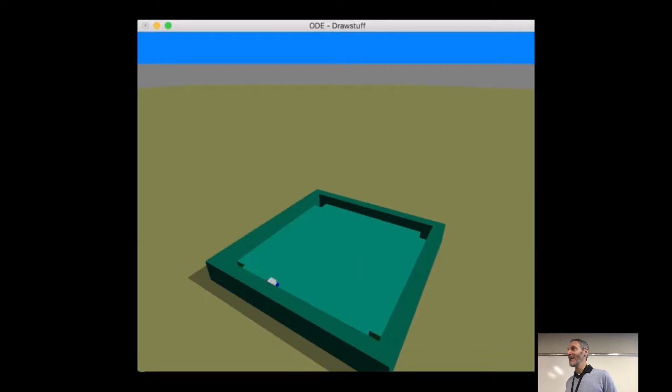Okay, you can read the rest at your leisure. I put in some links to the lecture slides here for some more interesting projects from years past. This is one of my favorite, the billiard bot. You can imagine it took the evolutionary algorithm a fair bit of time to find that neural network controller. Not bad.

Here's another project. Wait, sorry, I have a question. Sure. In the last one, did they evolve it on different configurations of the balls, or was it the same one? I don't remember the details, but if you click on that link, you can watch the full video, and I think there's more details in there. Yeah, good question.

Okay. All right, so back to why robotics. Last time we talked about the field of robotics in general, why it might be useful to try and create autonomous machines. We're going to speak, obviously, in this course about evolutionary robotics. So why would we try and create an evolutionary algorithm to automatically design an autonomous machine for us? Why not create one by hand using teams of human engineers?

There's several reasons why. The first one is that even if we build the body of a robot, like the nonaped that you see here, which is a 9-legged robot, even if we build by hand the body, it's very non-intuitive to see how to program it to produce useful behavior. So probably no one in robotics would argue that anyone is going to go in and hand design a neural network controller for a robot. It is a very non-intuitive problem. And I'm going to use the nonaped to motivate this.

The nonaped that you see down here in the bottom left is built from 2 Stewart platforms. There's a little animated GIF here showing you how a Stewart platform works. It's a little difficult to see in this GIF, but there are 1, 2, 3, 4, 5, 6 moving pistons that attach these two plates together. And as these pistons decrease and increase in length, they change the relative position and orientation of the plates relative to one another.

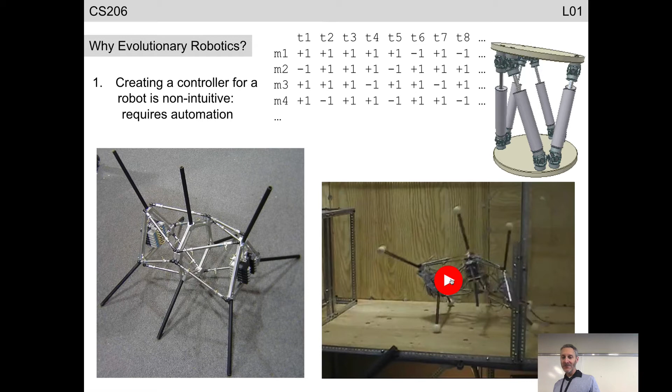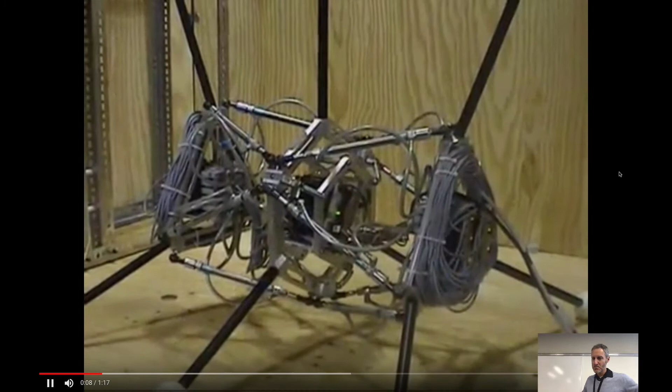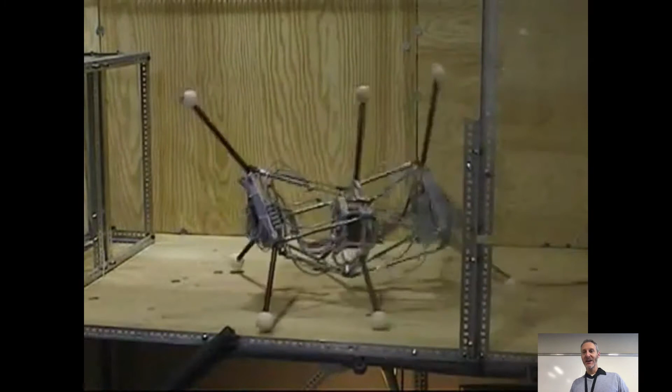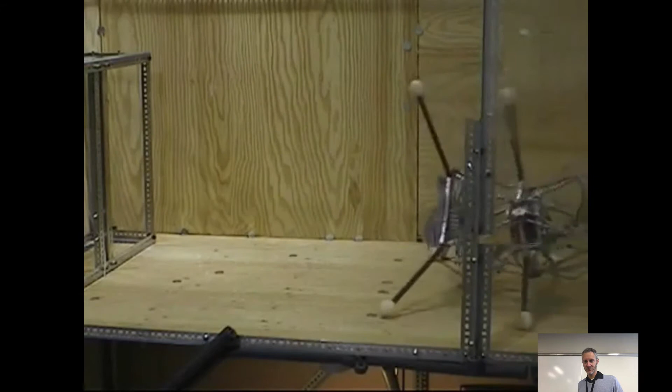We measured how far the nonaped moved, downloaded the next matrix, rinsed and repeated over many days. This was a physically exhausting experiment to be involved in. And at the end, we got things that looked like this. Attempt by the evolutionary algorithm. This is the nonaped stretching, warming up. Oops, sorry.

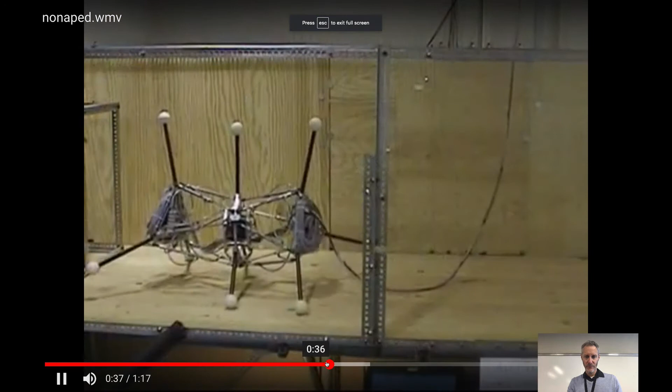At this point, when we saw these, we actually did start to get an intuition for how you might build this matrix. This one, not so much. So now the evolutionary algorithm is finding gaits faster than we could through human intuition. Okay. That's something you worked on. This is something I worked on.

So this was a project for NASA, and they were interested in this particular design for a particular reason. Why? It can't flip over. So the rovers that are on the red planet at the moment, if they ever enter a crater and start rolling down the edge of the crater, it's game over, right? So like we saw with the tensegrity robots on Tuesday, NASA would like to be able to send probes where orientation doesn't really matter. They can roll and tumble and carry on with the mission. This is one early idea that we helped out with.

Okay. How come you didn't do any virtual simulation stuff? Was it just before? So the reason why we didn't do any virtual simulations of this robot, as you can probably recognize, the dynamics or the movements of the robots are pretty complex. The robot itself is complex. One of the big challenges, which you will have hands-on experience with, is trying to simulate a complex mechanical device and make sure that it is stable in a virtual world like a physics engine. This is a non-trivial problem and is still an open challenge in the field.

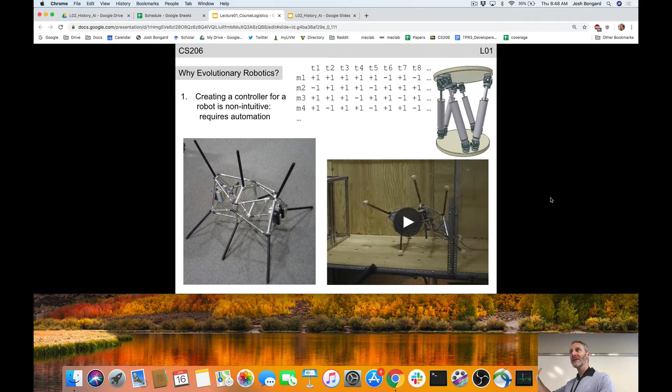We might be able to evolve very sophisticated virtual robots, but they often exploit details or inaccuracies in the physics engine that don't exist in the real world. And if we go to the considerable time and expense of actually manufacturing some of these evolved virtual designs, they do not do in reality what we saw in virtuality. It's called crossing the reality gap, and we'll spend a fair bit of time talking about it in about a month's time. Okay. So there's one reason why we want to automate the design of the controllers. In evolutionary robotics, we're going to use an evolutionary algorithm to design the controller.

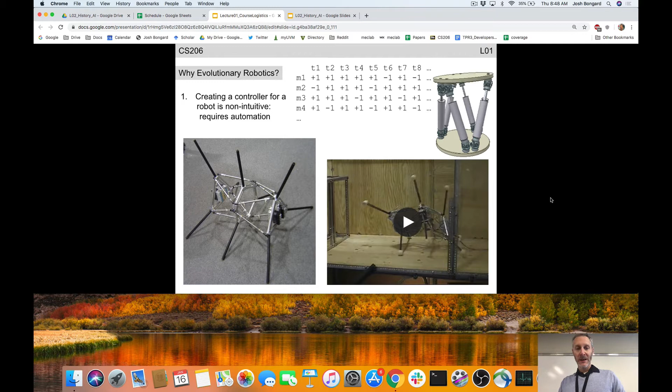It turns out that it is also often difficult. It is also difficult to come up with the right body plan in a lot of cases. So the nonaped, which was made of these two Stewart platforms, a lot of human ingenuity went into this problem. If we want a robot to perform a specific task, it is not always immediately obvious what the mechanical structure

should be. So again, going back to the example of NASA, NASA goes back and forth between thinking about sending legged probes or wheeled rovers or drones or crawling robots. We don't know a lot about the surface conditions of wherever they're going to send a probe, so it's not immediately obvious what the right body plan should be.

So one of the main distinguishing features of evolutionary robotics compared to other branches of robotics is, in many cases, you'll see that we're going to expand the breadth of evolution and allow it to tinker with the body plan as well as the controller. In the tensegrity robot example, in the nonaped example, those body plans were sort of unorthodox, but they were still designed by human engineers.

Here's an example just in a virtual space where the evolutionary algorithm is designing the body along with the controller. They're not very obvious body plans. You'll notice some of the elements of this robot are black and others are gray. Objects that are black have no neural control inside, so they're kind of like bone or a passive support. And the gray spheres that you see here have some neural structure in them.

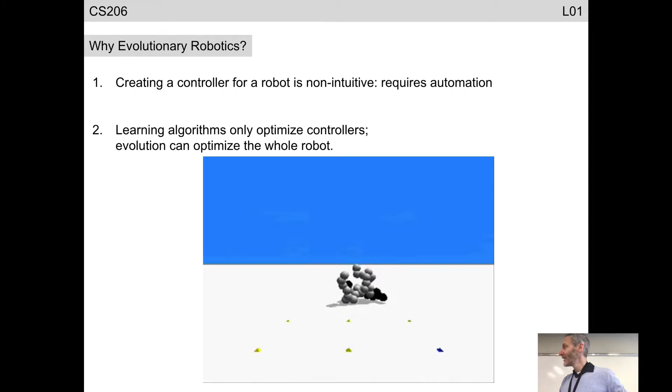Here's a design which for some reason manages to do well, which is to move quickly into the screen. Here's a bilaterally symmetric robot, which may have potential, but doesn't go anywhere, so was quickly deleted from the population. You can see, again, in an evolutionary algorithm, most of the candidates are non-functional. Here's sort of a non-obvious but functional design.

Okay. So what are the advantages? A research question which we will explore is, what are the advantages of automating the design of the body plan along with the controller compared to just manually designing the mechanical structure and optimizing the design of the controller?

Yes? You could save the time that it takes and the thought it takes to actually design the physical robot. Exactly. If we can automate more of the design process, it should speed things up, right? Human engineers are incredibly talented, but it still takes time to design and verify a mechanical structure.

Yes? Are you able to take the evolutionary algorithm and push it in a direction that you sort of want it to go down? Can we push the evolutionary algorithm down the path we want it to? You have a lot of these multi-legged vehicles. Yep. So you're obviously trying to get towards a centipede kind of motion. Can you just say, look at this, try to figure out how this works, and then evolve past it if you can? That's a great question.

So again, this is something we'll explore later in the course, which is how much detail do we give the evolutionary algorithm about what we want? And it turns out that there's a gradient. We can say, we just want a fast-moving robot. That's it, right? We can be as vague as we want, which has its advantages and disadvantages. Or we can say, we want something that's bilaterally symmetric. The left side of the body should look exactly like the right side of the body.

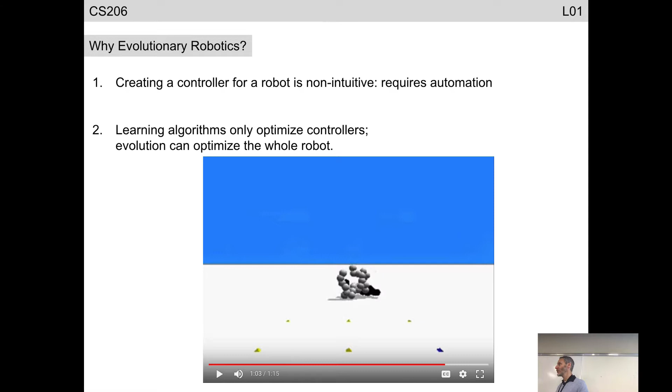Or we can go further and say, we want a centipede-type structure. Here's some videos of motions of actual centipedes. Do something like that, right? We can be more or less specific, and there are pros and cons to where on that gradient you pick your point. We'll talk about that again later.

Okay, good question. Okay, so this idea of expanding the evolutionary algorithm to include the body, this is sort of a step along the path of the history of AI, which we'll get to in a few minutes. Most of the early decades of AI was dealing with creating a non-embodied AI, like a neural network.

So here's a little cartoon picture of a neural network where the gray circles are meant to represent neurons and the arrows are meant to represent synapses. We would like this neural network to take as input a photo, for example, and output a signal indicating whether the neural network thinks there's a cat in the image or not, right? Sort of standard non-embodied AI approaches.

If we have a neural network that's doing an okay job of recognizing cats in photos, and we alter the weight of one of these synapses, what's the impact on the ability of the neural network to recognize cats in photos? Does it get better? Does it get worse? Does it get worse by a lot or just a little? There's a lot of early work in AI about fixing the architecture of the neural network and then tuning some of the parameters.

Was there a question? No? Okay.

In just a few years, now that neural networks research has made some progress, there are now questions about, can we automatically design or tune the architecture of the neural network? So now, instead of the human fixing the architecture and allowing the computer to alter parameters, can it start to add and remove neurons and synapses?

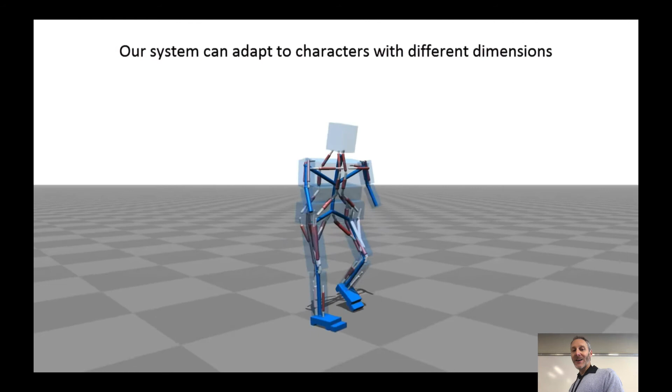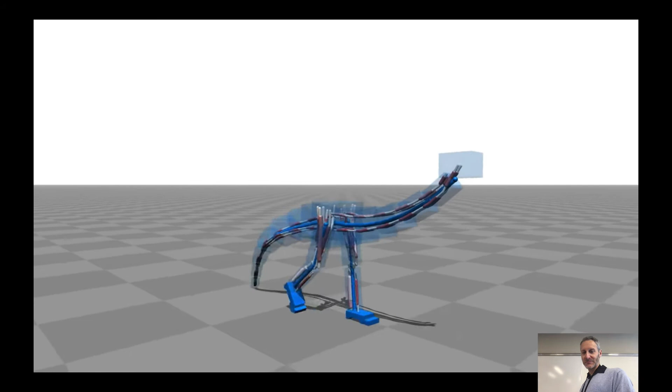In this case, they're fixing the body plan, but they're evolving the muscle placement inside the body. Why would they do that? It turns out that the neural network controllers they find are adaptive to changes in the body. This was actually a computer graphics project. You can obviously see the entertainment quotient here. This is a particular type of evolutionary algorithm, and a nice visualization of how an evolutionary algorithm works.

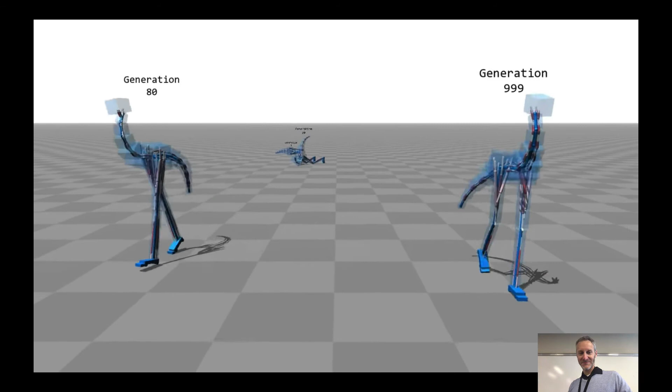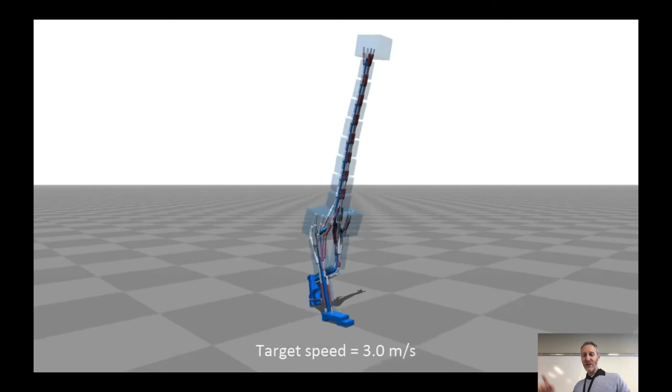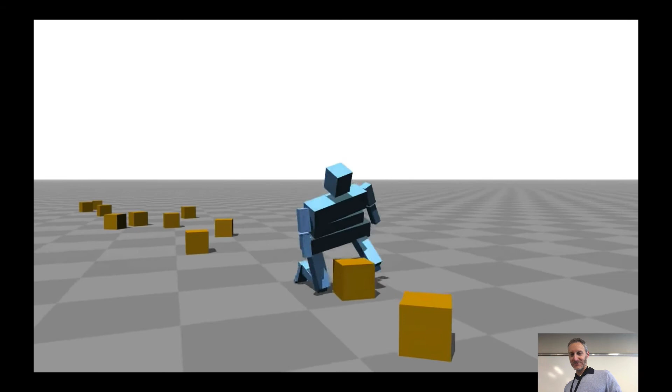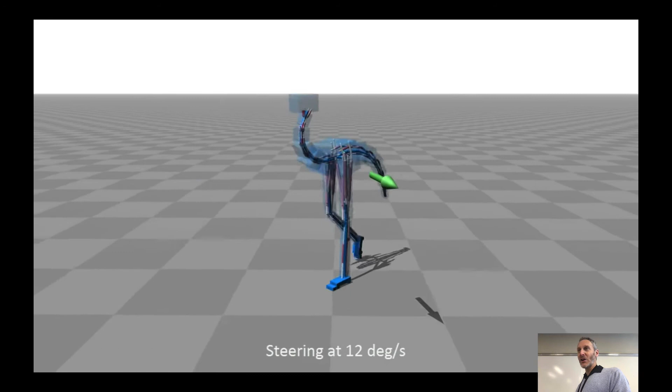Okay, let me speed up the video here a little bit. So here in the fitness function, they were asking for movement at a particular velocity. So a little bit more detail in the fitness function. Someone was asking about being hit by objects. So robustness to changes in the environment. They could also use a joystick and control the movement.

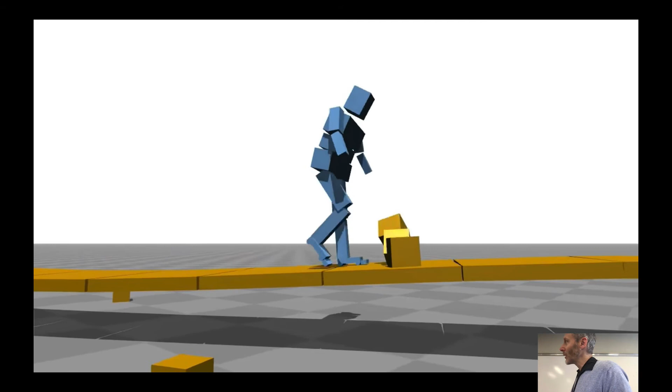It had a lot of social media interest when it came out. Someone quipped, "This is what my Monday feels like." Okay. I'll leave you. You can watch the rest of this video at your leisure.

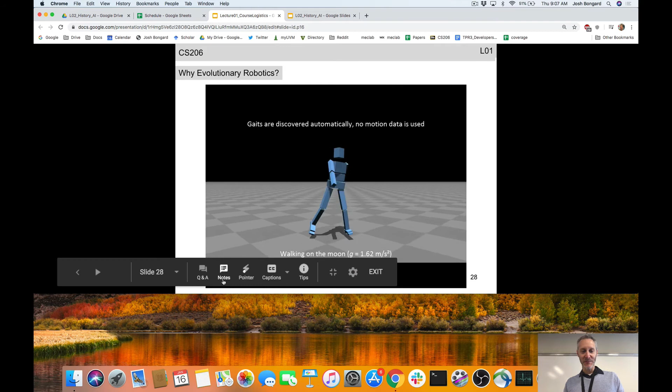Okay. So, and now for something completely different, let's switch and talk about the history of AI, which will again allow us to situate evolutionary robotics in the larger landscape of AI and robotics. Since this is a history, we're going to do this in chronological order. We're going to start with cogito ergo sum, which was said by Descartes, right? So I think, therefore, I am, mentioned by René Descartes in his Discourse on Method back in the 1600s. So a long way back for us to start the history of AI and robotics.